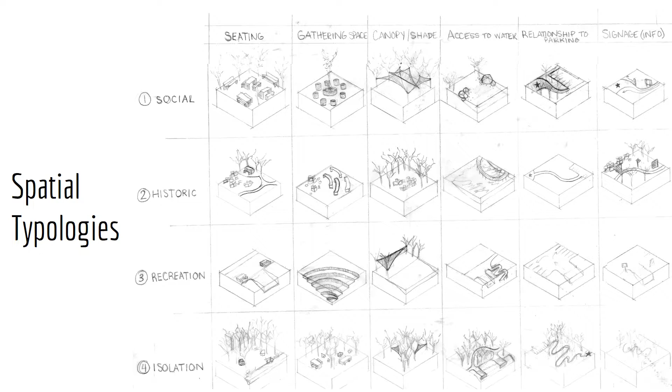The spatial typologies that we have set up indicate the necessary functions and implementations on each site. Each of these typologies dictates the way in which the necessary functions are implemented spatially.

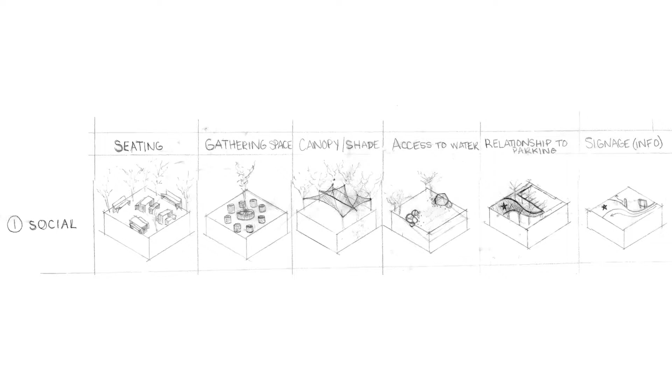Social spatial typologies are geared toward groups of people interacting with one another and providing opportunities to do things together. Here we provide spaces for interaction and focus on human connections.

Historic typologies may have signage or technology that informs users about the history of the site. However, the spatial techniques will help more to highlight certain historic aspects at that site, as well as reference other parts of the river to create a cohesive understanding of the river's past.

Recreational typologies are geared toward people doing things together, but with a focus on the activities of what they're doing.

These spatial typologies promote the feeling of isolation. They promote being separated from large groups in the bustle of the city and an immersion into the landscape.

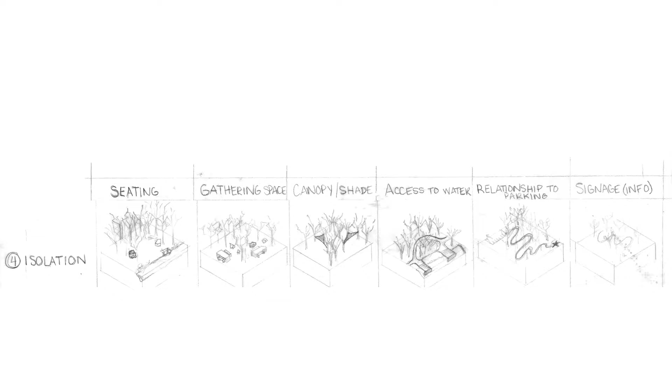Path typologies characterize the different moments along a path meandering between destination points on a site. The quality of the path creates a feeling that changes depending on where you are throughout the site and alludes as to what is to come.

Recreational paths are relatively wide and smoothly paved. These are ideal for walking, biking, roller skating, or rolling coolers, kayaks, or strollers with your friends and family.

Social paths are wide, relatively smooth, geared toward walking multiple abreast and experiencing the walk together. These are ideal for promoting social well-being.

Isolation paths are narrow, and can be smooth or difficult to navigate. They ideally promote isolation and removal from the city and an immersion into the landscape. These paths should be in close proximity to natural vegetation.

We chose to focus our master plan on Jones Bridge Park. We chose this site because we felt it offered an opportunity for each of our site types, being historic, recreational, social, and isolated, as well as enough space to facilitate gradual and meaningful transitions between those spaces.

As you can see, we have implemented designs on already existing features along the linear site, as well as proposed new ones.

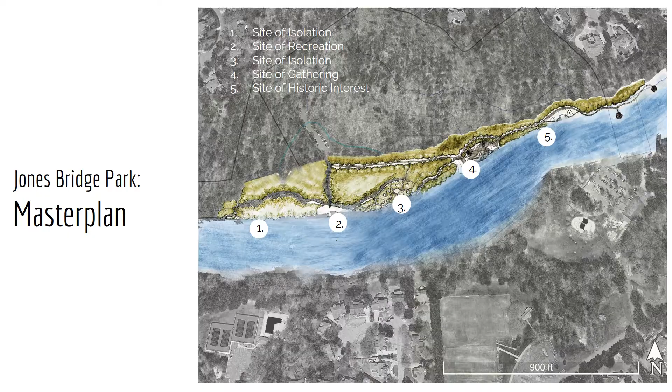The historic site provides an opportunity to interact somewhat with the existing bridge. The main space offers a beach and a boat ramp for users floating down the river to get off and explore. There is also a gathering space and areas to camp or set up a hammock.

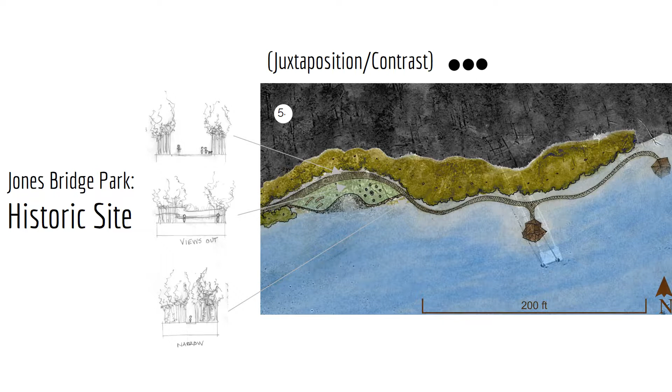The floating steel shoals reflect a modern take on the rock shoals just downstream. They offer a space to get off and enjoy lunch under the bridge while staying on the water.

Since we are deeming this site a historic site, these are the desired facilities and functions provided on site, as per our spatial typologies.

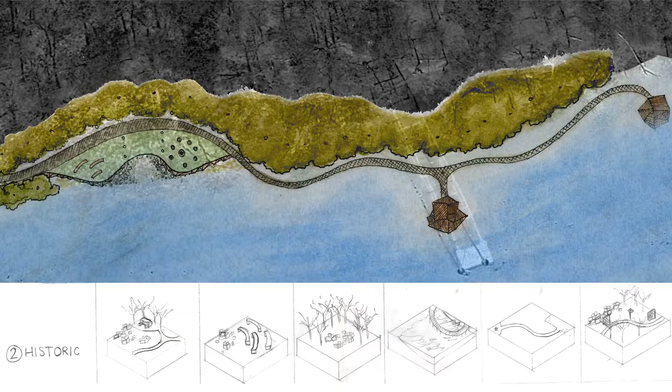The Corten steel retaining wall and water wall subtly imitate the character of the rock faces along the Chattahoochee. This reflects a historic aspect of the river, as the steel changes over time, much like the rocks change with weather over time.

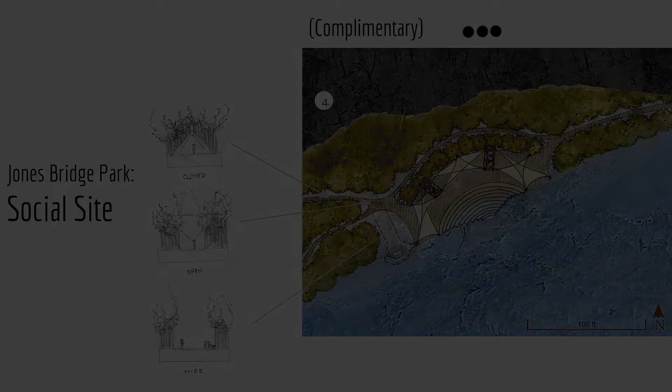The social site creates an opportunity for people to gather and enjoy the river in a modern, well-equipped space. The space is somewhat divided into three smaller sections by raised Corten steel planters, giving the opportunity for multiple gatherings at once. The spaces converge at the water, however, creating a true community space for interaction amongst the users.

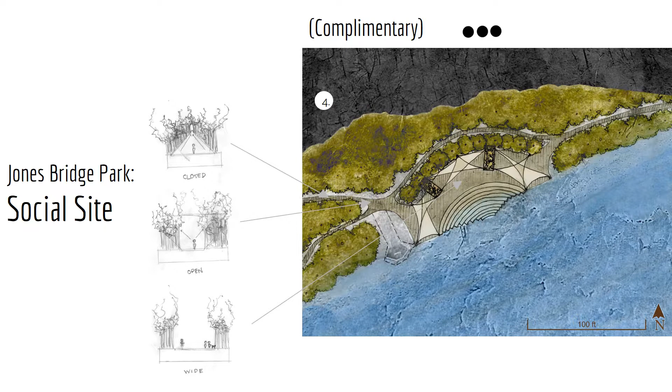The path type changes as one progresses from a path of isolation to a path of gathering. These are our social spatial typologies that we have applied on site.

By using the materiality inspired by the main architectural element on the site, Jones Bridge, a modern take on what the river is used for now versus what it was used for then can be revealed. The ephemeral quality of water takes on a different form as it flows onto the steps, reflecting the newer nature of the site while maintaining its historic reflection as well.

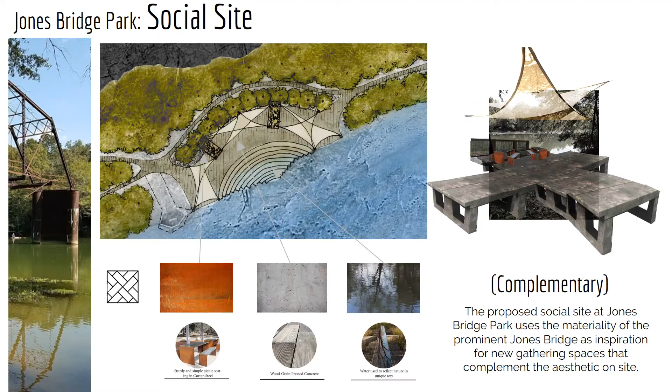Isolation sites have paths that connect many smaller subsections of the site to promote the feeling of isolation. These paths should be narrow and surrounded on both sides by relatively dense vegetation. As users enter and move along these paths, they should have closed views, further immersing them into nature. As users near the next clearing, paths should begin to open up a little, providing a sense of intrigue and continuing to pull users into the clearing.

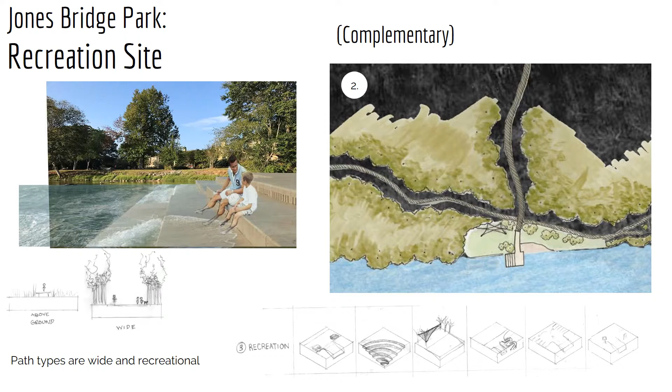While some recreational sites along the river should allow access to boat ramps, we decided the proximity to parking made this an undesirable place for a put-in or take-out point, but instead makes a great break along the river.

As in the previously described isolation site, paths here can be narrow and closed, with views into pockets and clearings. These site types are meant to provide a sense of immersion into nature. Nature in these sites is critical to obstruct views and provide the enclosed feelings that make these sites work.

These clearings can be experienced in sequence, either along a walk or while floating down the river. While floating, they can spark intrigue and promote stopping to explore. Views into the clearings can direct users through the site, while covered views out of clearings, especially along the river, can allow users to linger, watch, and experience the site and surroundings.

Now we'll talk about the river typologies that we've identified consistently along the river. These typologies are bridges, shoals and fords, beaches, islands, cliffs, and unimpeded vegetation. We feel these are important to analyze through the experience tools we have identified in order to achieve our concept.

Now we'll talk about the materials on these typologies. The Chattahoochee River Basin is underlain by Precambrian and Paleozoic crystalline rocks. The Piedmont region in which we are working, the Chattahoochee, consists mostly of granite, schist, and gneiss. The geology on site at the Palisades is resemblant of these rock types. The element of water is also ever present in this typology.

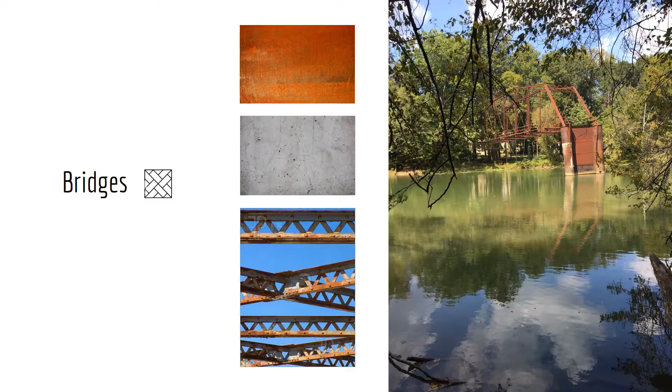Now we'll look at the important form and views along these typologies. Cliffs and rock formations offer consistent views into the river formation over time. Forms and views of bridges are vertical and horizontal, which really help to break up the linear nature of the river.

Leading views and curves in the river offer an element of curiosity and surprise as you float along the river. Now we'll talk about important vegetation along the corridor. From what we know about the Piedmont region of the Chattahoochee and from what we saw on the trip, we can assume the dominant tree types along the river. This area was predominantly hardwood forest, with trees such as elms, maples, oaks, and hickories, and pine trees.

After identifying the important aspects and limitations of each type of site, you'll be able to start implementing our suggestions all along the river and tying the sites together. By rethinking the way native vegetation is used along the corridor, the desired effects of our framework could be achieved.

Reflection: vegetation mimics native plants and growing patterns. Complementary: native plantings and rigid walkways complement each other when directly adjacent. Juxtaposition: native plants and planter boxes juxtapose natural form. Material use brings juxtaposition, Corten steel planters for example. Formal plantings on a more natural path provide an equal and opposite juxtaposition.

By rethinking and reusing types of materials already found along the river, we have provided a matrix that NPS can tap into to gain consistency and provide a modern lens into the landscape and identity along the way. Again, these materials are wood, metals, stone, glass, and water.

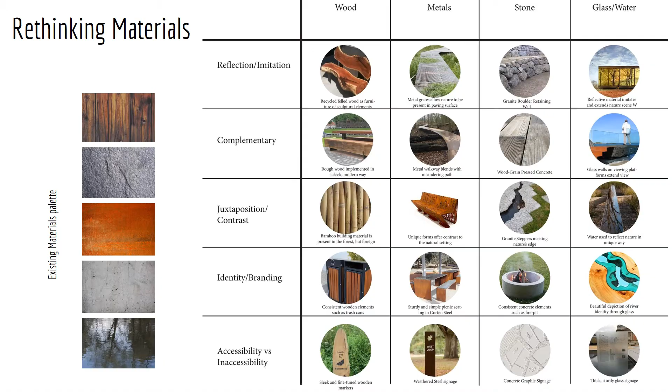By implementing these strategies on most or all of the sites along the 48-mile corridor, cohesion and consistency in the ways the Chattahoochee is highlighted will start to identify the Chattahoochee as a river not only rooted in the past, but in the present and in the future.